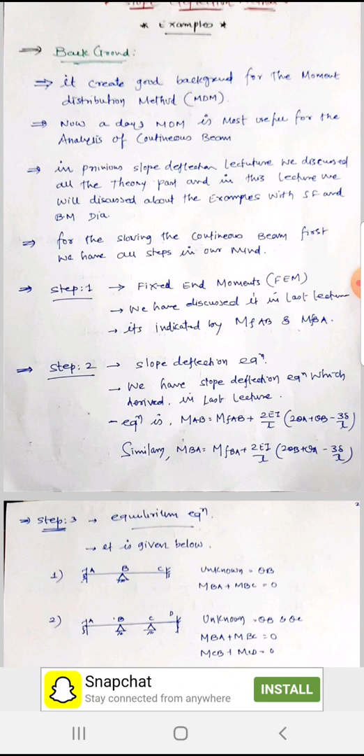Now today we are discussing the example of how we can calculate the shear force and bending moment values and how we can draw the diagrams for shear force and bending moment. So dear friends, let's start with some background about the previous discussion.

First, it's very important, the slope deflection method creates a good background for the moment distribution method. Nowadays, moment distribution method is most important for the analysis of continuous beam.

In the previous lecture, slope deflection method was discussed, all the things, and today we are discussing about the examples with shear force and bending moment.

For the solving of the continuous beam, first we have knowledge about all the steps which are used for the analysis of continuous beam with the help of slope deflection method.

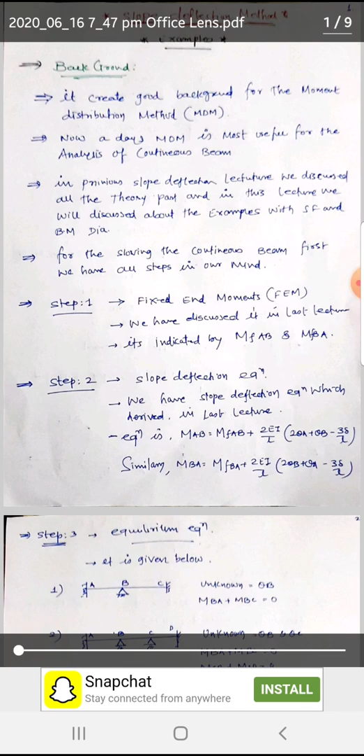So fixed end moment is depending upon the type of load that can act on the beam. In last lecture we discussed the fixed end moment, and it is indicated by MFAB and MFBA. MFAB means fixed end moment from A to B, and MFBA means fixed end moment from B to A.

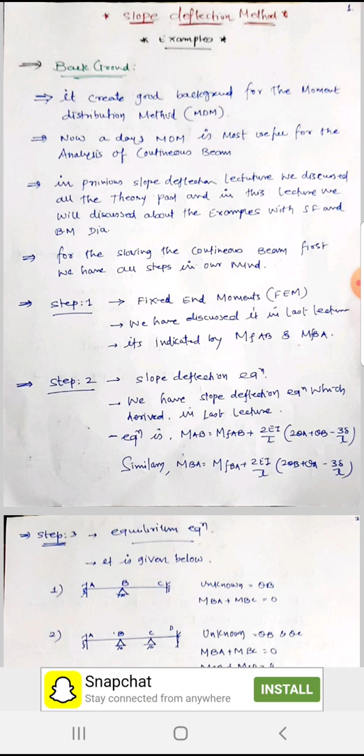Now, step number 2, slope deflection equation. We have the slope deflection equation which we derived in our last lecture.

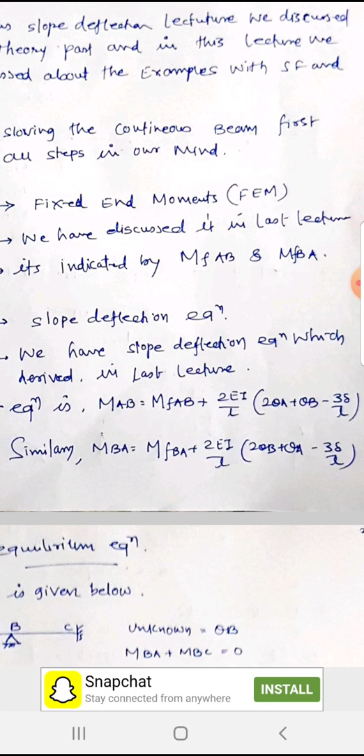The equation is MAB, means moment from A to B. MAB is equal to MFAB plus 2EI upon L, times 2 theta A plus theta B minus 3 delta upon L.

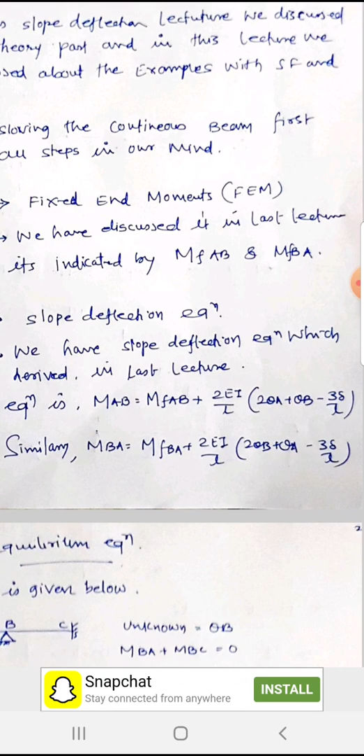Here there is some trick to memorize this equation. MAB means fixed end moment is also MFAB, and in the bracket there is 2 theta A, meaning here for moment at A to B, theta A is taken 2 times and theta B is taken single time.

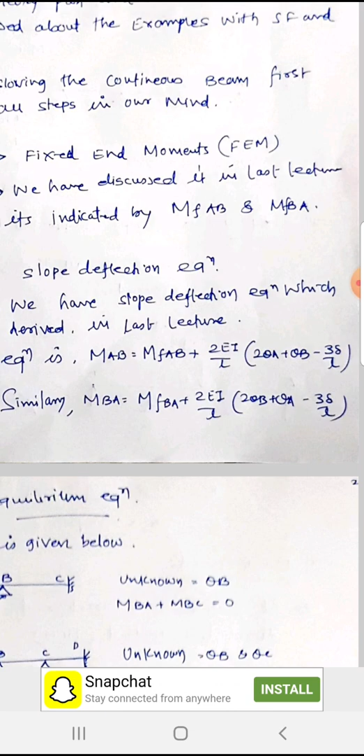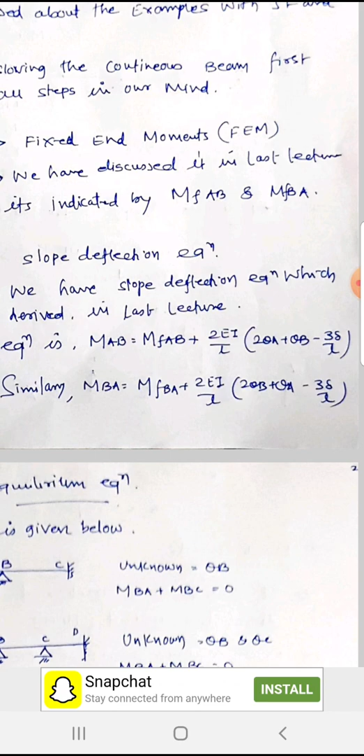Similarly, the second equation is MBA is equal to MFBA plus 2EI upon L, in the bracket 2 theta B plus theta A minus 3 delta upon L. Here we are calculating moment from B to A, that's why theta B is taken 2 times here.

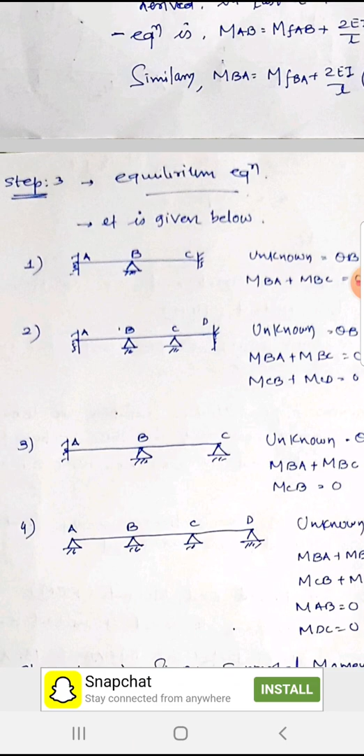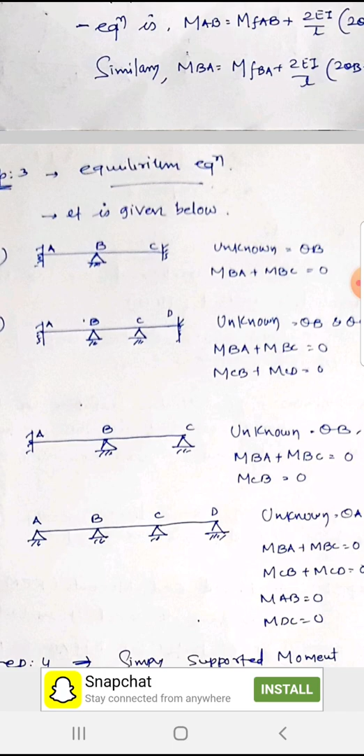Okay, the most important step, that is equilibrium equation. Number 1, here two span continuous beam A, B and C. Support A and support C both are fixed, and we know that slope is 0 at a fixed support, but in a simple support or hinge support, slope is there. That's why in this case theta B is going to be calculated.

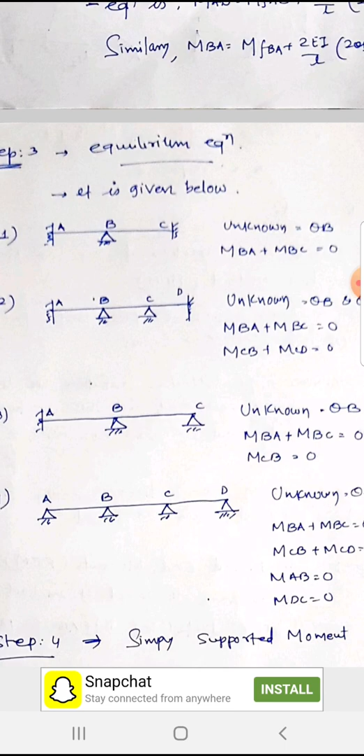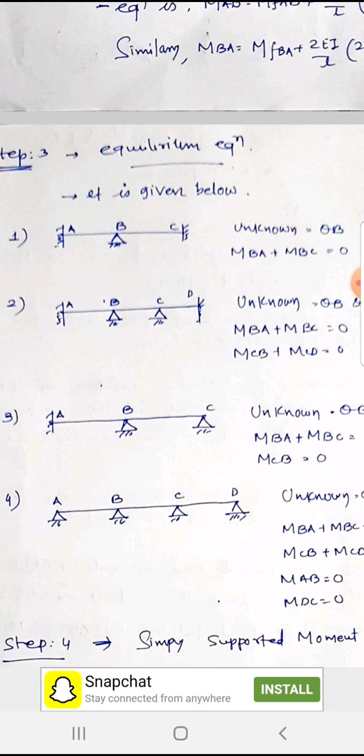So the unknown is theta B, and what we are going to do is balance this rotation with the help of slope and deflection. For that we are considering that moment from B to A plus moment from B to C should be 0. Summation of moment from B to A plus moment from B to C is 0.

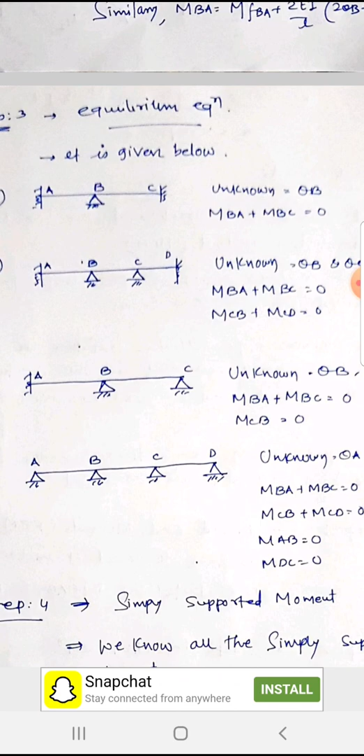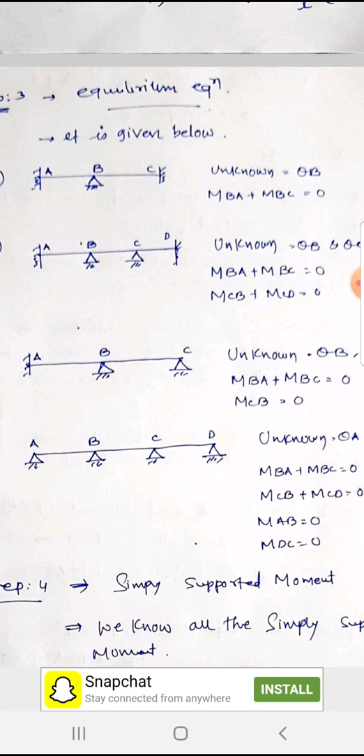Second, there are 3 span continuous beam A, B, C, D. In that case, again A and D supports are both fixed, that's why theta A and theta D are both 0. But the unknowns are theta B and theta C. For finding these two unknowns, we are considering two equilibrium equations: moment from B to A plus moment from B to C equals 0, and for the second joint, moment from C to B plus moment from C to D equals 0.

Here we have a simple trick to memorize this. If there is a simple support, then we must take the moment at that joint equal to 0. If it is continuous, meaning that joint is connected with two spans, then the sum of those two span moments is equal to 0.

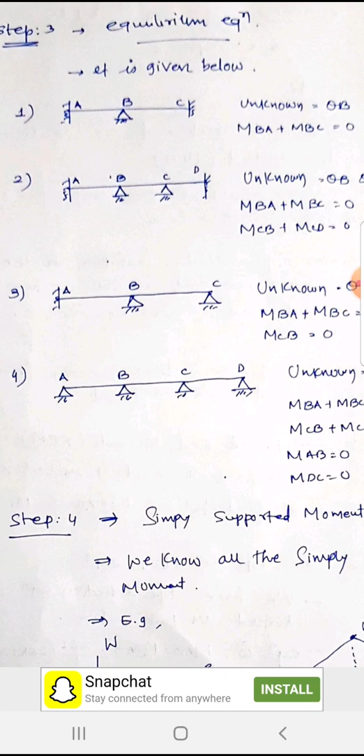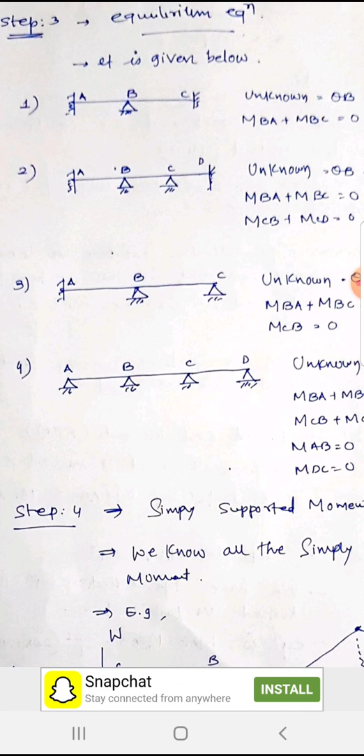Let's understand this, number 3. This is again two span continuous beam A, B, C. Support A is fixed, meaning theta A is equal to 0, but here support B and support C are both hinged, meaning theta B and theta C are both unknown. So how can we get that? Moment from B to A plus moment from B to C equals 0, and moment from C to B is also 0 because both are simple supports.

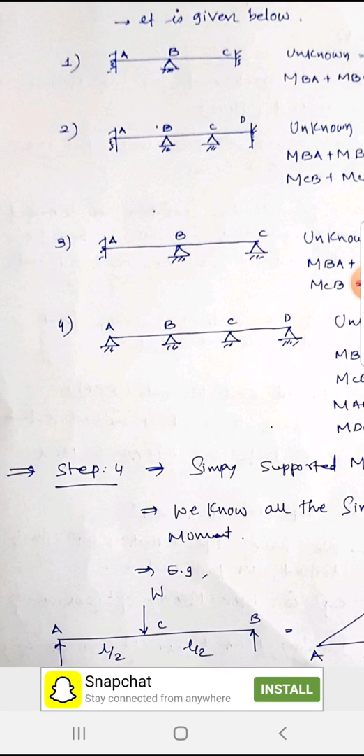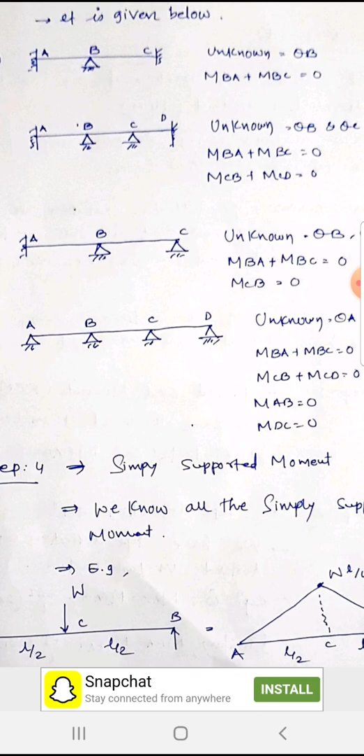Number 4, here 3 span continuous beam and all the supports are simple, meaning the unknowns are theta A, theta B, theta C and theta D. So how can we solve that?

Moment from B to A plus moment from B to C is 0. Moment from C to B plus moment from C to D is 0. Moment A to B is equal to 0 and moment of D to C is equal to 0.

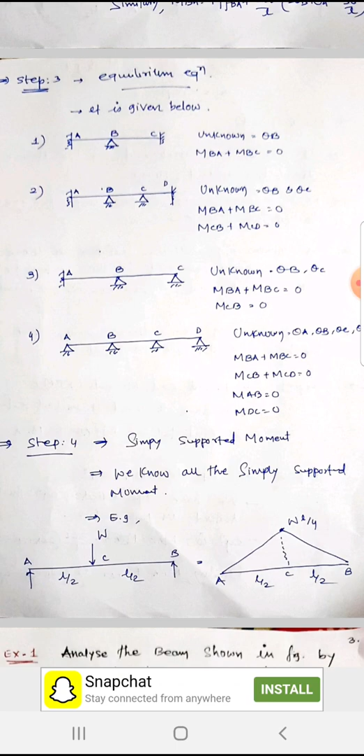So these are the equilibrium equations. It is changed case to case, which we have discussed in our next session.

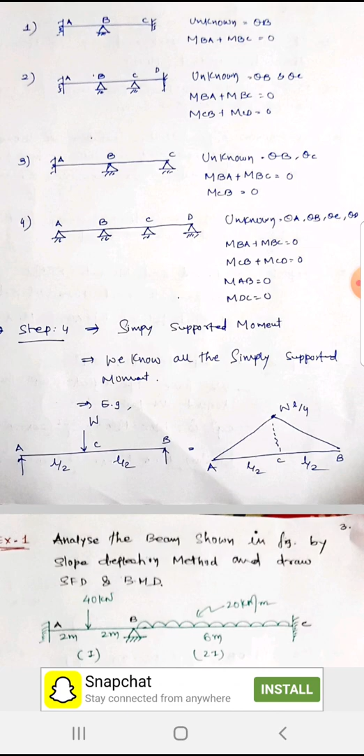Step number 4, simply supported moment, that we know about all the simple support moments. Here I have taken some simple examples. Number 1, suppose this is a simple support span A, B, C, right?

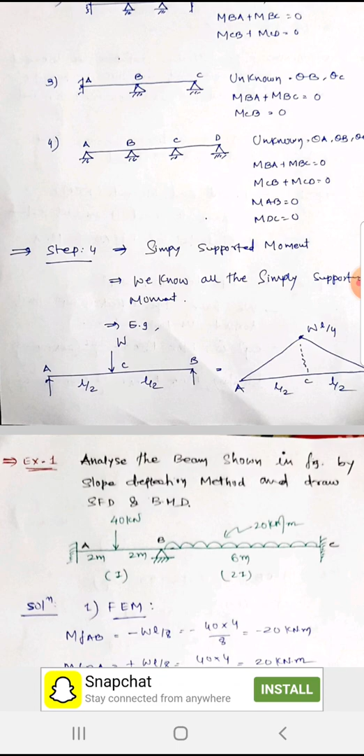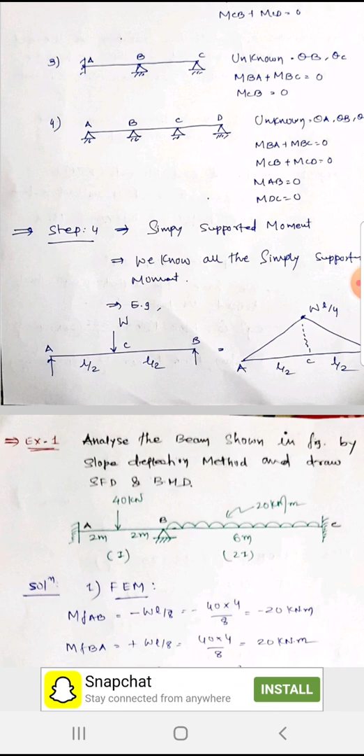At center, that is C point, where point load W is acting, it is at the mid of the span, and the moment, span moment is WL by 4. Same way, simply supported with UDL, that is loaded by W kilonewton per meter, then span moment is WL square by 8. These things we have already studied.

Now I am going to start the example. Example number 1: analyze the beam shown in the figure by slope deflection method and draw shear force and bending moment diagram.

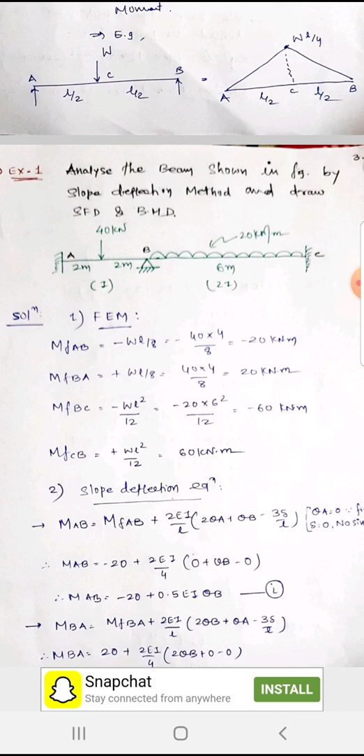Here two span continuous beam ABC, support A and support C both are fixed, and support B is hinged or simple. AB span having point load 40 kN, acting at the midpoint of the AB span, and in BC span there is UDL 20 kN per meter, having span 6 meter.

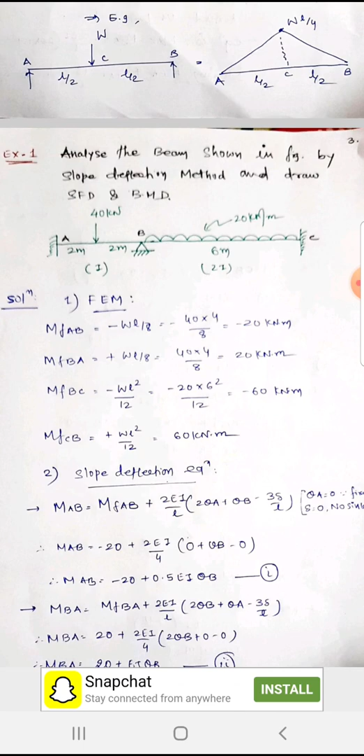AB span has flexural rigidity I, single value, but from B to C flexural rigidity is 2 times, meaning the depth from B to C is more. Now what are we going to do for the analysis of this beam?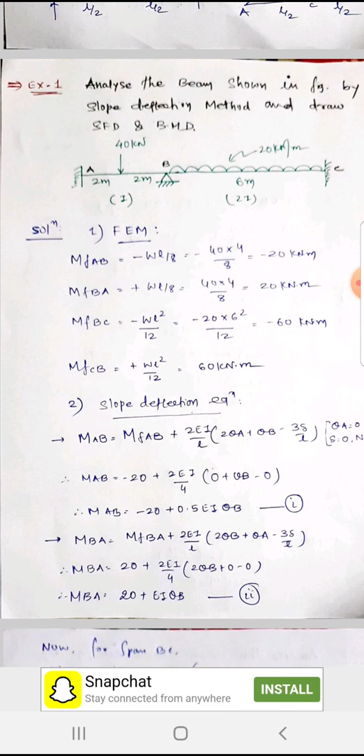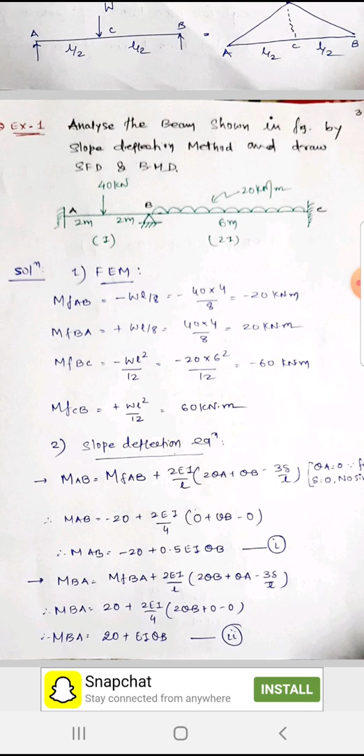So we have all the steps. Our first step is fixed end moment. What we are going to do? We are considering AB as a single span fixed at both ends. Then the fixed moment, MFAB is equal to minus WL by 8.

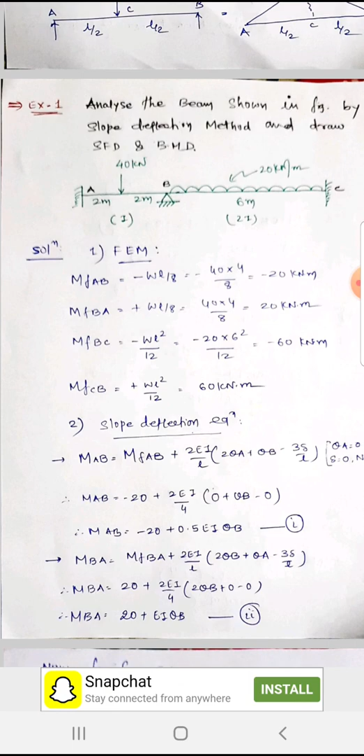This is the fixed end moment equation and we have to memorize it for the fixed beam with point load at center. Then we can get the value, that is minus 20 kilonewton meter.

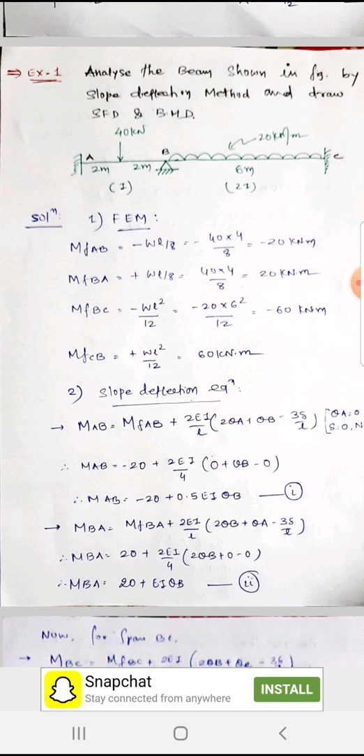From B to A, same equation WL by 8, but the sign is positive because here we are considering the hogging moment, and for hogging moment, the left hand side moment is minus and right hand side moment is plus.

Again for BC span, the fixed moment is minus WL square by 12. It is fixed for the UDL and we can get the value, that is 60 kilonewton meter, but it is minus because left side moment is minus and right side moment is plus. That's why fixed moment MFCB is plus 60 kilonewton meter.

The first step is over. Now step number 2, slope deflection equation.

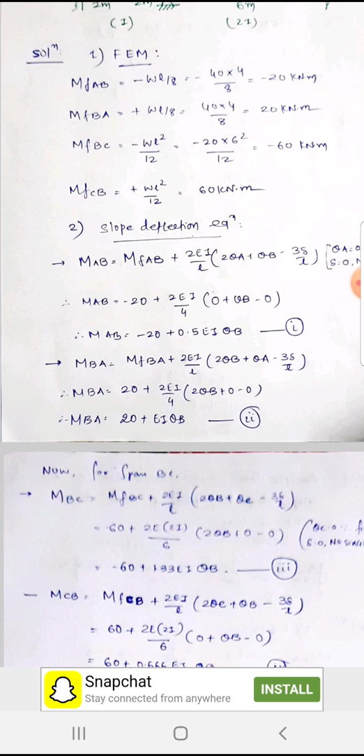We have the fixed equation for any continuous beam, that is the first equation, MAB. That equation is MFAB plus 2EI upon L in the bracket 2 theta A plus theta B minus 3 delta upon L. We have already discussed and derived that in our previous lecture.

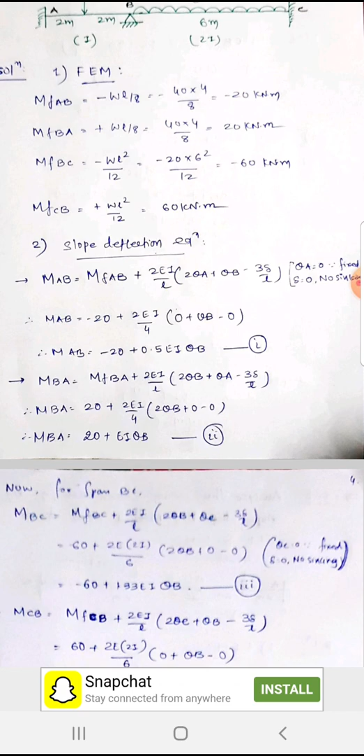Here theta A is equal to 0 because support A is fixed, and we are also considering delta is 0, because there is no sinking of support. If the support sinks, it is clearly indicated in the question, but here there is no sinking given in the example, that's why we consider delta equal to 0.

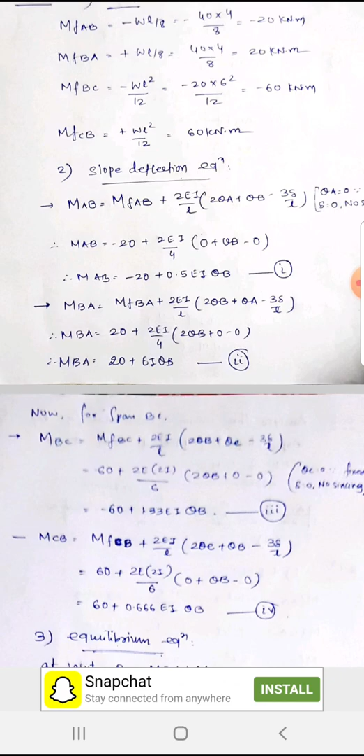Now what is MAB? We are putting all the values in that equation and finally we get moment at AB equal to minus 20 plus 0.5 EI theta B. We are taking this as equation number 1.

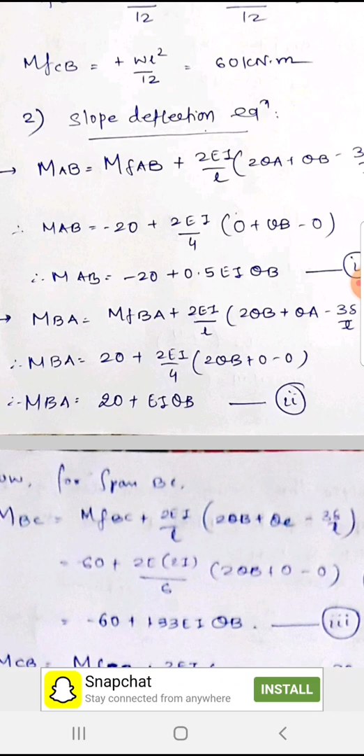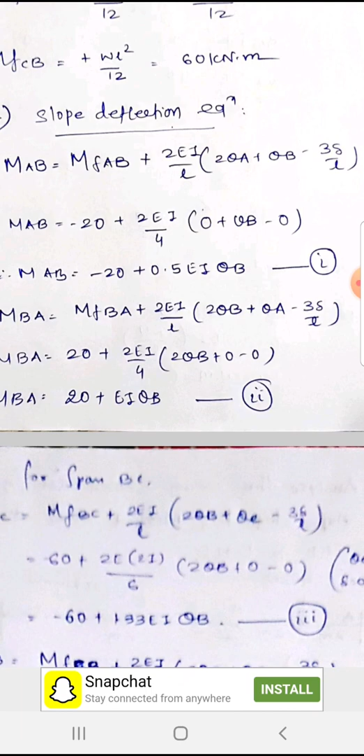Again same thing for B to A. So what is the change in equation? MBA is equal to MFBA plus 2EI upon L in the bracket 2 theta B plus theta A minus 3 delta upon L. Theta A and delta are 0. Again we get moment from B to A equal to 20 plus EI theta B. This is our equation number 2.

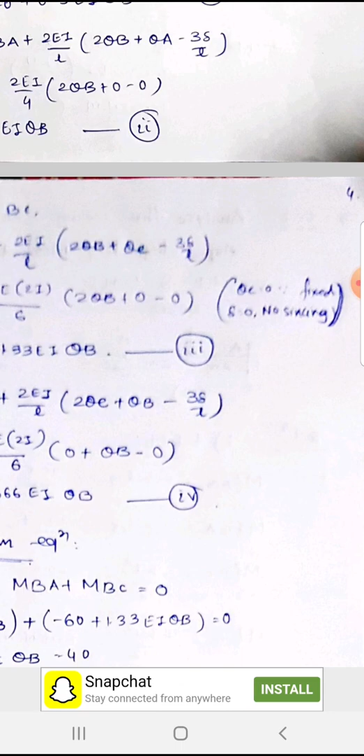Now the same thing for the next span, BC. MBC is equal to MFBC plus 2EI upon L in the bracket 2 theta B plus theta C minus 3 delta upon L. Here again theta C is equal to 0 because fixed at C, and there is no sinking, so again delta is equal to 0. So we get minus 60 plus 1.33 EI theta B, that is our equation number 3.

Now moment from C to B, the equation is MCB is equal to MFCB plus 2EI upon L, 2 theta C plus theta B minus 3 delta upon L.

Theta c and delta is 0, then we can get the equation: 60 plus 0.666 ei theta b, as equation number 4. This is our second step, and we can get the equations for span 2, indicated by equation numbers 1, 2, 3 and 4.

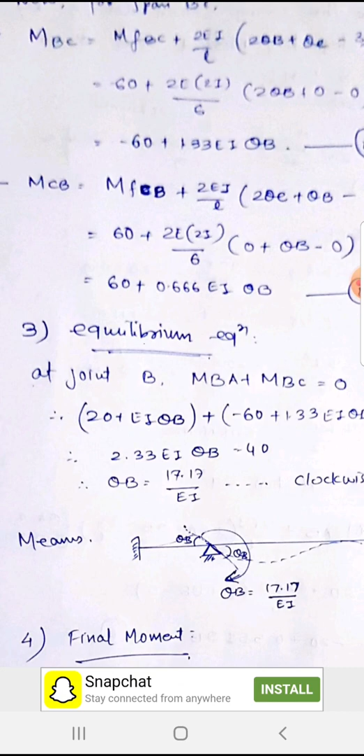This is in the form of unknowns. Here we have a single hinge support at B, that's why the only unknown is theta B. Now how can we get that unknown?

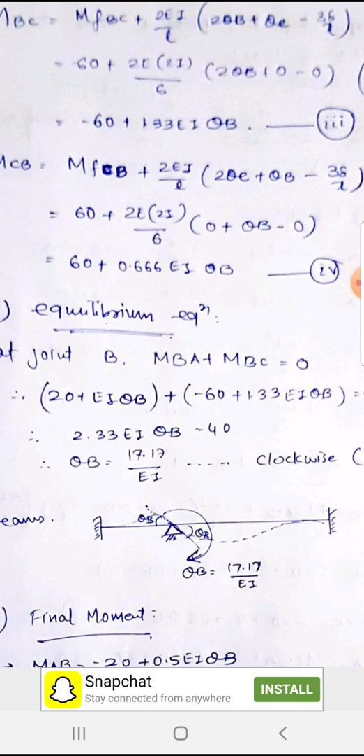With the help of the equilibrium equation, that is our step number 3. At joint B, moment from B to A plus moment from B to C is equal to 0. This is our equilibrium equation. So here we have the value of MBA and MBC, previously found from the equations.

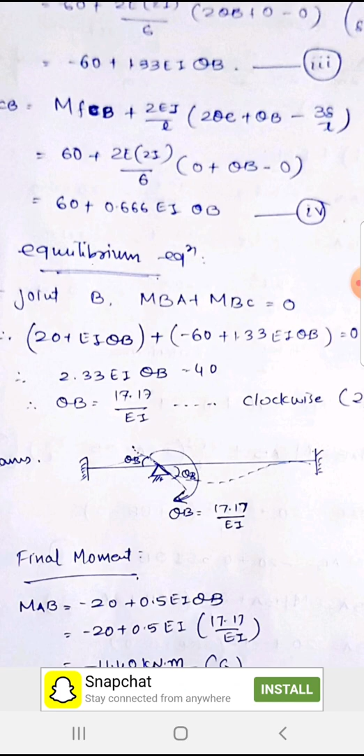Now summation of all this equation, and we can get theta b is equal to 17.17 upon ei, that is clockwise. We get the value of theta b as plus, that's why we are taking it as clockwise. Suppose we get this value as minus, then it is anti-clockwise.

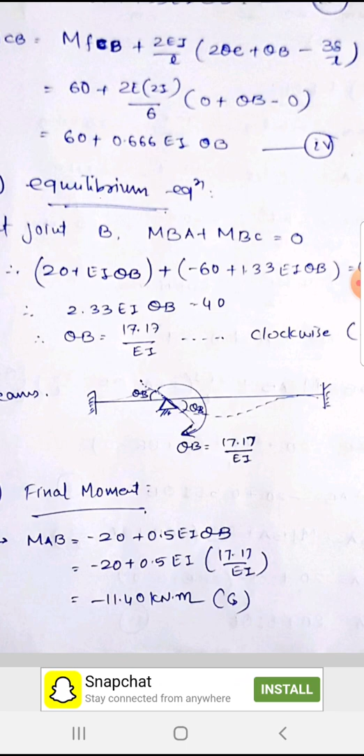So now actually what happened in our structure? With the help of drawing we get the clockwise moment, then from support B the whole structure rotates clockwise and deflects like this, as given in the figure.

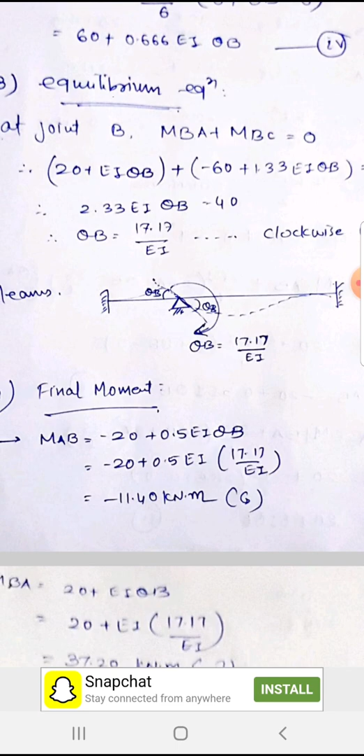Now final moment. So we have equations of moment AB, moment BA, moment BC and moment CB. We are going to put this theta B, which we have found, into all the equations, and finally we get the final end moments: MAB is equal to minus 11.40.

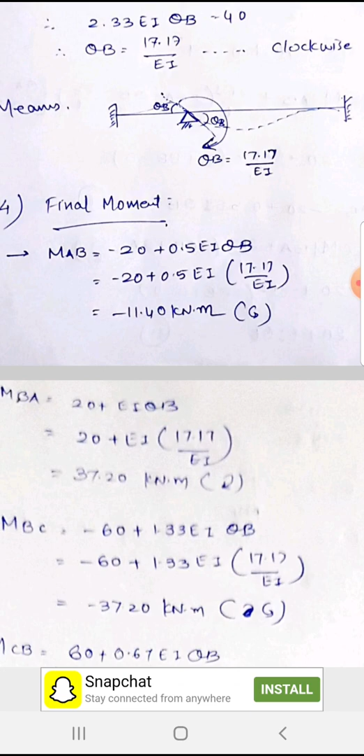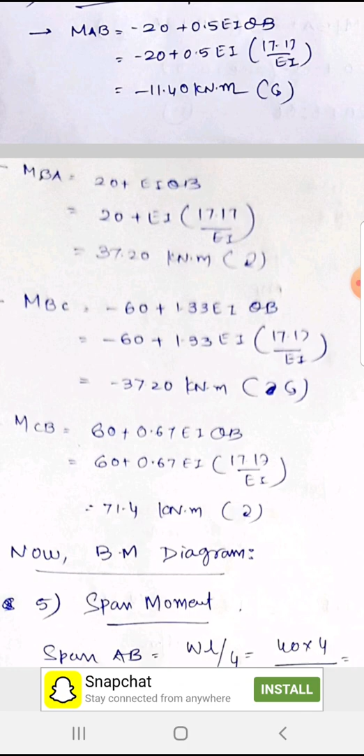Here we get the value, that minus means the moment at AB is anti-clockwise. Now moment from BA, after getting 37.20 kilonewton into meter, it is positive, meaning it is clockwise. Moment from B to C is minus 37.20 kilonewton into meter.

Friends, here both these values, moment from B to A and moment from B to C, are getting the same value, meaning the rotation theta B we got from the equation, and after putting that in, the moment at a single joint is the same. Moment from B to A and moment from B to C means support moment; here we have only one support, B, so at one support the moment will be the same, that's why here we got a common value, that is...

37.20 kilonewton into meter, and moment from CB is 71.4 kilonewton into meter, it is plus, that's why it is clockwise. Now what are we going to do?

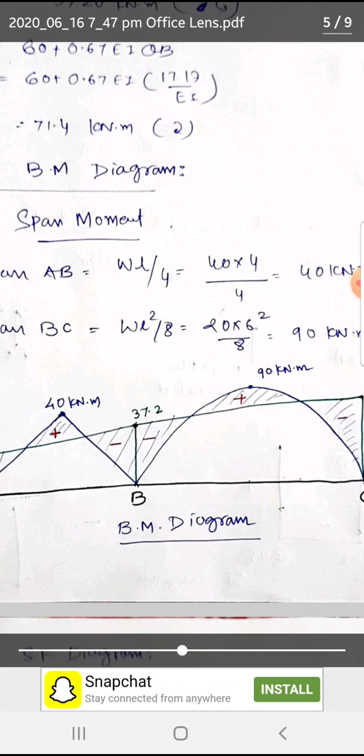Now we have all the values of moment at support, but our next step is finding out the span moments. For span AB, the moment is WL by 4, that we know, and that value is 40 kilonewton into meter, and for the span BC it is WL square by 8, this is the fixed equation, and it is 90 kilonewton into meter.

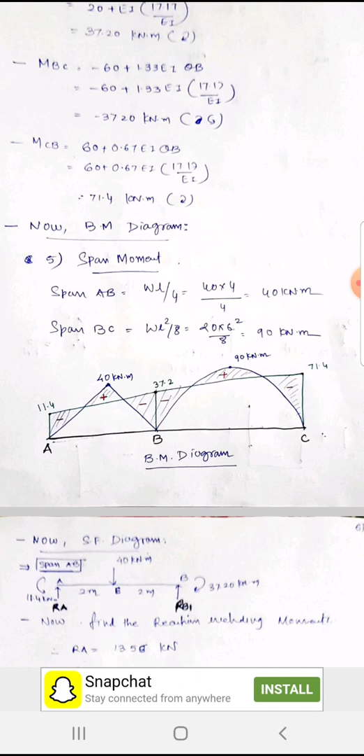So here, first what we are going to do is draw the span moment. After that, at support, what are the moments that we have found out? At support A it is 11.4, at support B 37.2, and at support C 71.4. Now this support moment is joined by the inclined line and the span moment that we know.

For this simply supported beam with point load, it is indicated by straight lines, and for the UDL it is a curve, a parabolic curve. So our bending moment diagram is ready.

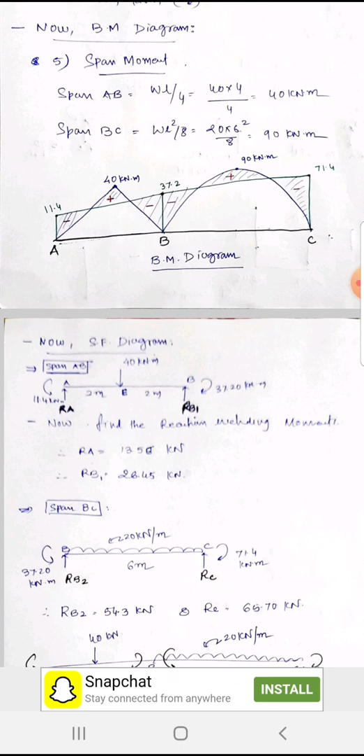Now shear force diagram. How can we get the shear force diagram? For that we must find out the reactions of this individual span, and after that we can get the shear force diagram. So for span AB...

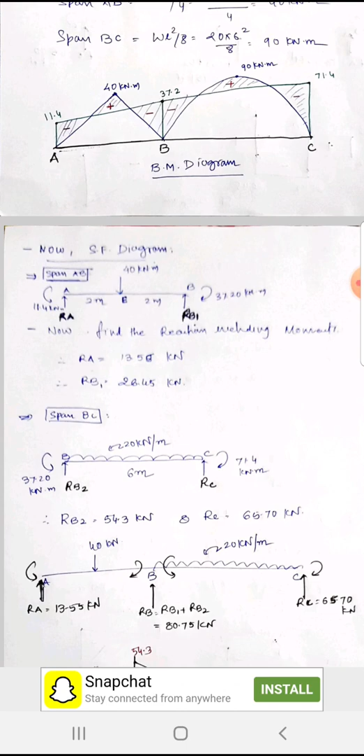40 kilonewton at the mid span, and we have here support moment that is at A 11.4 and at B 37.2, that we have found.

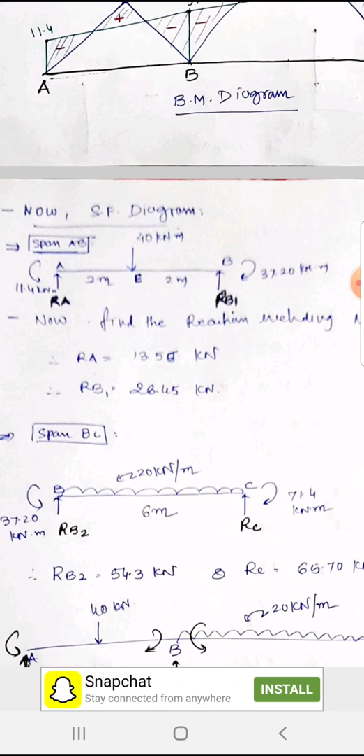So what we are going to do now is find out the reaction at support A and at support B, including moments. So we know how to find out the reaction. I have written down here directly: reaction at A is 13.55, and reaction at B is 26.45.

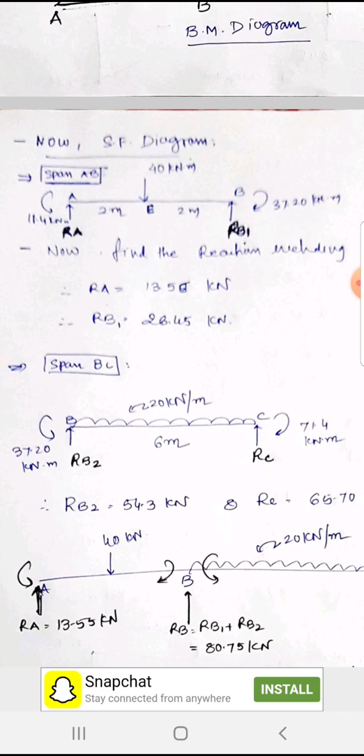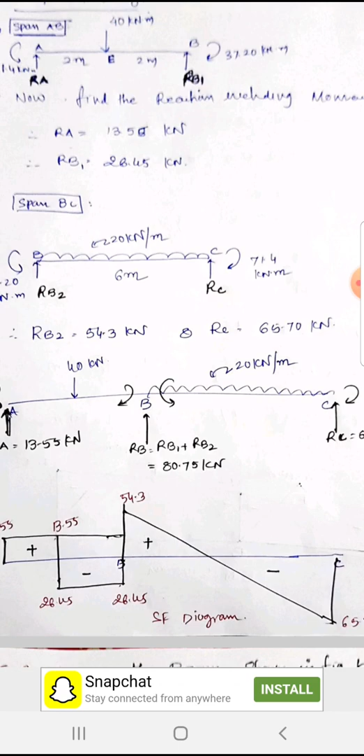Same way for span BC, again we are going to find the reactions with the help of moments. So we can get the reaction at B is 54.3 and reaction at C is 65.70 kilonewton. Now here we have all the reactions clearly indicated.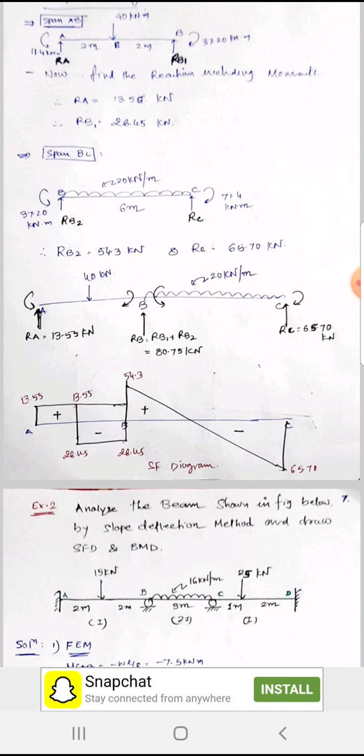Reaction at A is 13.55, reaction at B is the sum of reaction at B due to first span and reaction at B due to second span. It is 80.75, and at C that is 65.70. So we are getting the shear force diagram, it is like that, and we know how to draw this shear force diagram. So friends, it is very much simple.

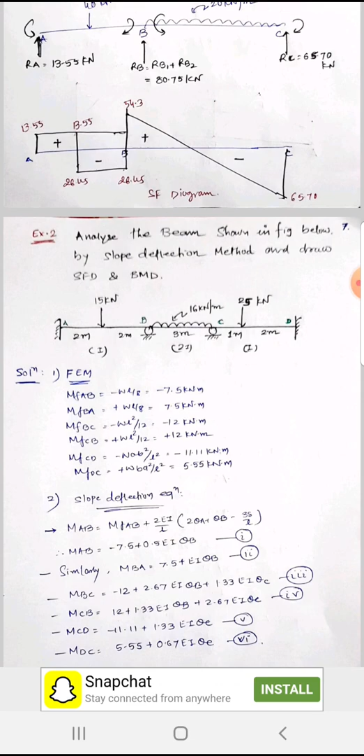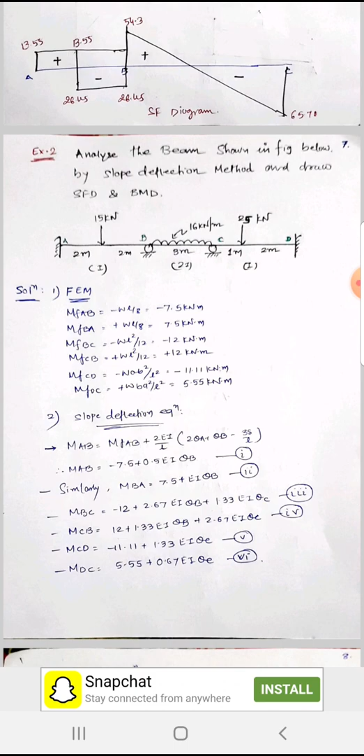Now, how we can get the bending moment and shear force diagram with the help of slope deflection method. Another example, here I have taken a 3-span continuous beam with 3 different loading. Let's start with example number 2. Analyze the beam shown in the figure below by the slope deflection method and draw shear force and bending moment diagram. Here in the first span, point load at the center, in second span UDL, and in third span the point load is not in middle, it is eccentric.

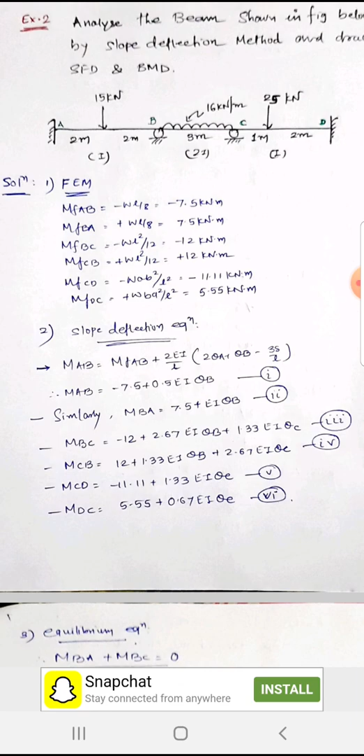So how we can get the shear force and bending moment diagram for this continuous beam? We have all the steps. In our first step, that is fixed end moment, and how we can get that fixed end moment, we know. For MFAB, it is equation minus WL by 8, MFBA plus WL by 8, MFBC minus WL square by 12, MFCB plus WL square by 12, and here a little bit change in span CD because it is eccentric load. So for that, MFCD is equal to minus WAB square upon L square, and for MFDC plus WBA square upon L square. Here a little bit change in the equation.

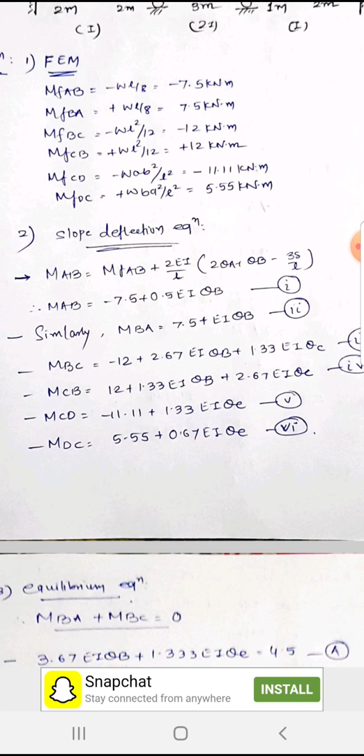Now step number 2, slope deflection equation, and for that we have the equation of slope deflection. MAB is equal to MFAB plus 2EI upon L, 2 theta A plus theta B minus 3 delta upon L. This equation is common for all.

But what we are going to do over here? We are going to find the first unknowns and put those values in this equation. Which are the unknowns? Here, three span continuous beam, and support B and support C both are hinge supports. That's why here the unknowns are theta B and theta C, and we are getting this equation in the form of those two unknowns. Here we have three spans, that's why we are getting 6 equations.

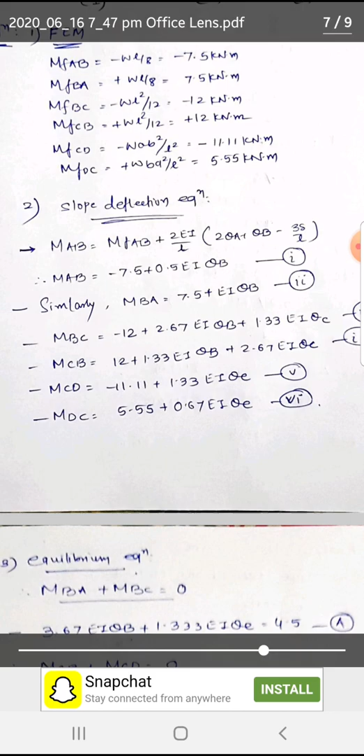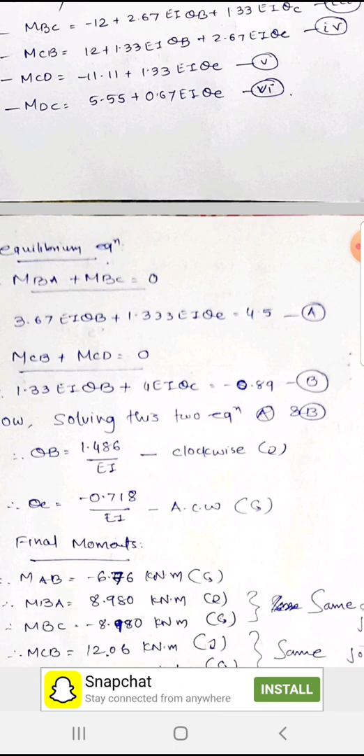Now step number 3, equilibrium equation. So what is the equilibrium equation? Here we have two supports which are pin supports. So the equilibrium equation is moment from B to A plus moment from B to C is equal to 0. In that equation we have summation of two equations, and what we can get here is 3.67 EI theta B plus 1.33 EI theta C is equal to 4.5. That is indicated by equation A.

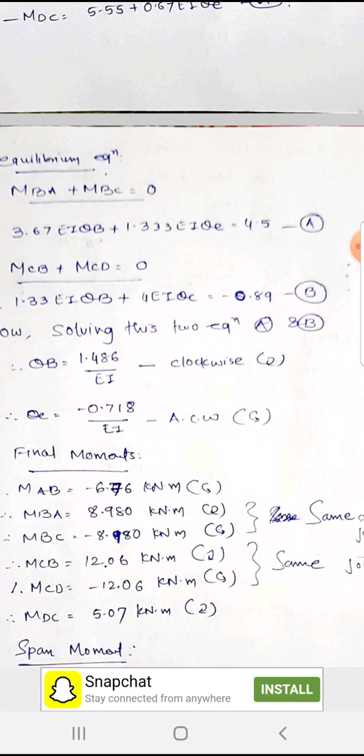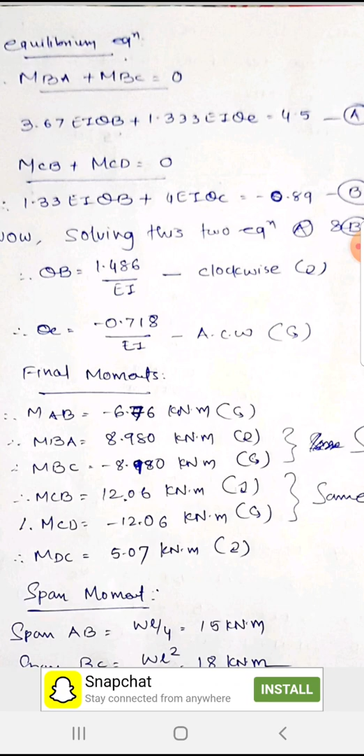And the second equilibrium equation is moment from C to B plus moment from C to D is 0. And we can get the equation 1.33 EI theta B plus 4 EI theta C is equal to minus 0.89, and it is indicated by B. Now we can solve these two equations, we can get the unknowns theta B and theta C. Theta B is clockwise and theta C is getting minus, that's why it is anti-clockwise.

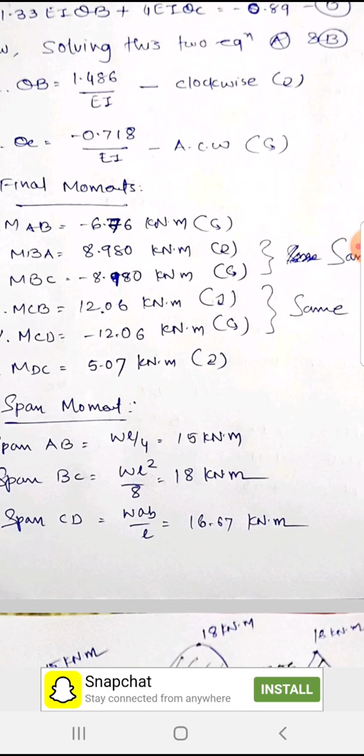Now put these two unknowns in our step number 2, and we can get the final moment at support. MAB, MBA, MBC, we get these 6 values. And here the most important thing is moment from B to A and moment from B to C, both the values are same. And moment from C to B and moment from C to D, both values again same, because it is a single joint, and at a single joint we will always get the same moment.

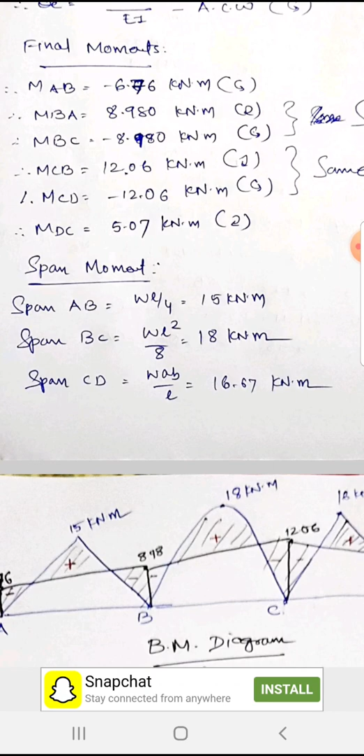Now next step, that is span moment. For span AB, WL by 4, span BC, WL squared by 8, and span CD, WAB upon L. So from this span moment, first we draw the simply supported bending moment diagram, and afterwards we draw the negative diagram, that is support moment, which is indicated over here. So connect all these values by lines and get the bending moment diagram.

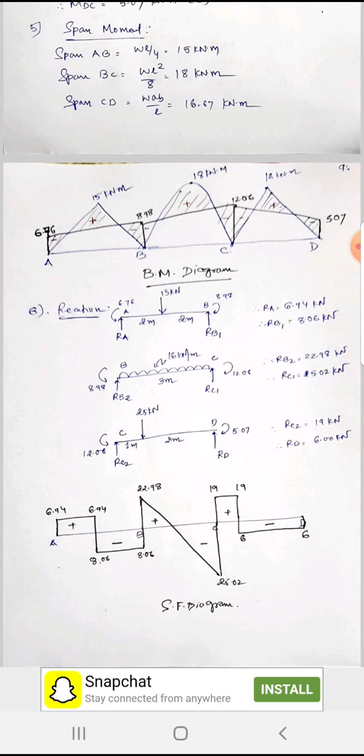Same way, reaction for the shear force diagram. So for 3 spans we are getting 6 reactions, and with the help of those reactions we can draw this shear force diagram, which is indicated over here. So friends, this method is very much simple, and once we get the values of unknowns, we can find all the support moments, span moments, and we can easily draw shear force and bending moment diagrams.